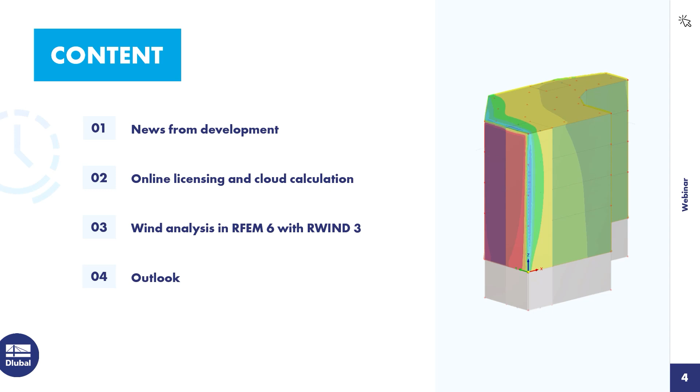The first feature that I want to show you is the consideration of initial states. So Rwind 3 now considers automatically initial states if they are present in RFEM 6. So whenever you are calculating a load case or a load combination that has an assigned initial state, then the initial state will be calculated first, and then this geometry is taken over to Rwind 3, and then the wind analysis is performed with this initial state geometry. This is especially important and necessary for membrane structures. So this is now possible.

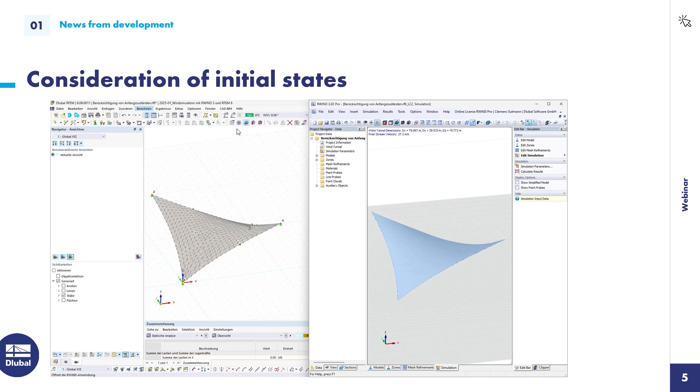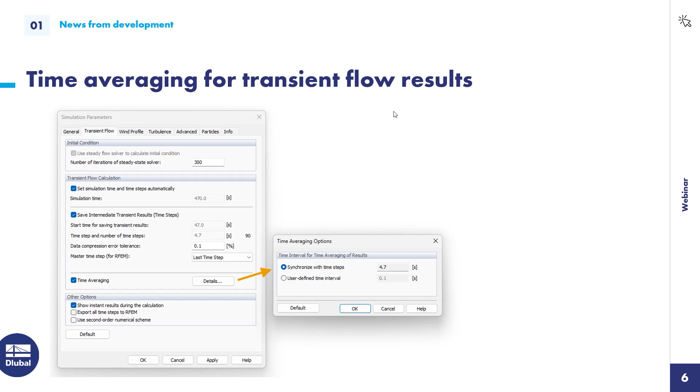Then you have now the possibility to average results over time when doing a transient flow analysis. This is a feature that is currently only available in Rwind 3, but not in RFEM 6. So whenever you need that, you have to go into Rwind 3 and change or select that option there.

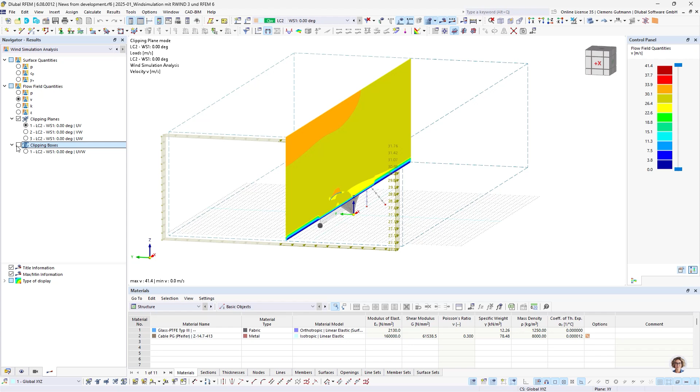The third new feature is the clipping box for flow field results. So I want to show you this directly in RFEM. Up until now, it was possible to display the flow field results in a clipping plane, and the clipping plane automatically had the size of the wind tunnel. And now we implemented a clipping box into RFEM 6. So you can reduce the size of that clipping plane to what's actually mostly needed. So usually you want to know the quantities around the structure and not for the whole wind tunnel that is only needed for the calculation.

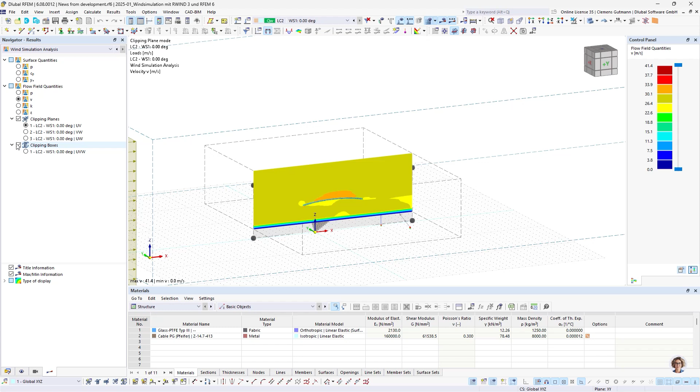And this is now possible if you activate that checkbox over here. And if you click the radio button, then you can drag the clipping box to the size that you want, and then switch back to the clipping plane, so you can manipulate the clipping plane as you need it.

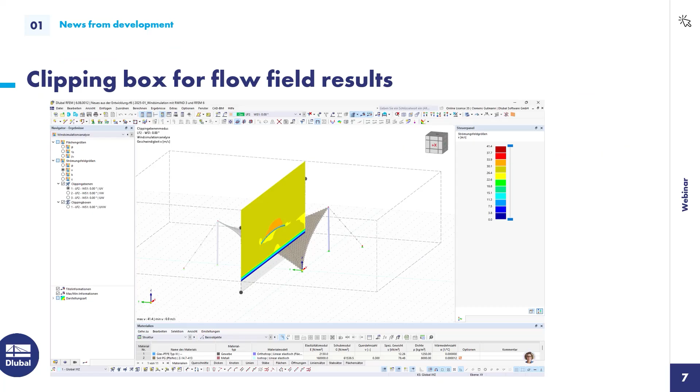We then implemented the possibility to display the pressure and pressure coefficients on the original model. So up until now, it was only possible to display the results on the computational model that came from Rwind. But now you can also inspect the results projected on the original model. I also want to show you how that looks in RFEM 6 itself.

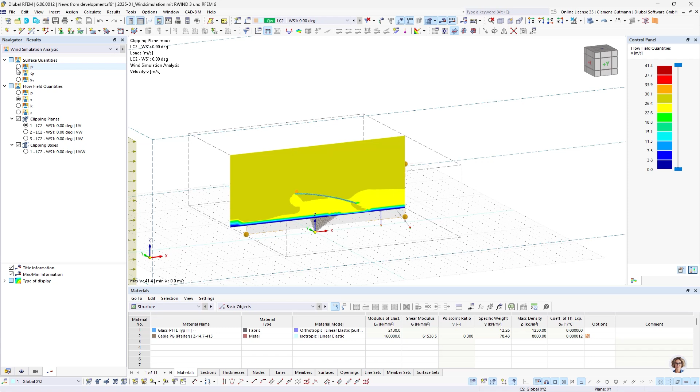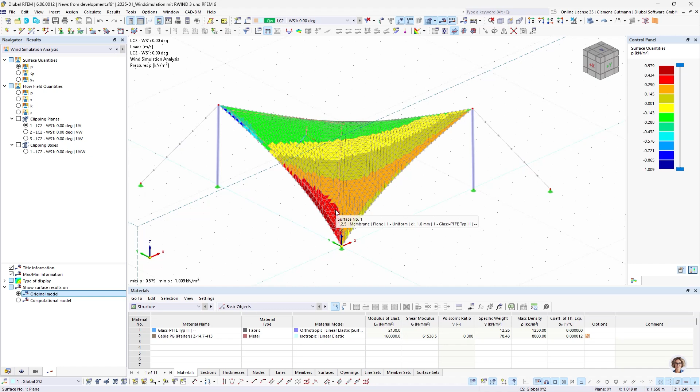So if you have the pressure or the pressure coefficients selected here in the result navigator, then you have a new possibility for the display down here. So this was possible before. You have the computational model from Rwind and the results displayed on it, but now you can switch to the original model and you see the mesh and structure of the original RFEM 6 model and inspect the results on the original model too.

And the last new feature is the possibility to close hollow sections. This is a new default setting that can be changed in the mesh settings in RFEM 6. I'm going to show you this in a second.

So usually, like with this membrane structure, you don't want the wind to go into the hollow section, because usually you have a detail there that connects all the elements together. But of course, it's also possible, if you have bigger hollow sections, to open them up. But usually it's not wanted. And there's this setting I'm going to show you.

You go on the mesh settings, wind simulation, and now you have here a check that says that only the external surfaces for hollow sections shall be used, and that also means that they are capped at the start and at the end.

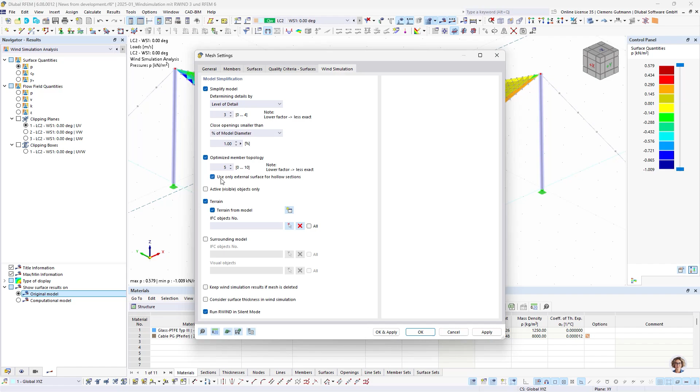Let's come to the biggest new feature from the last months. So as you know, we released RWIND last summer, and the most important new feature is the online licensing. The online licensing you already know from RFEM 6, RSTAB 9, and RSECTION 1, has all the advantages of coming with the online license, and these advantages we now brought to RWIND as well.

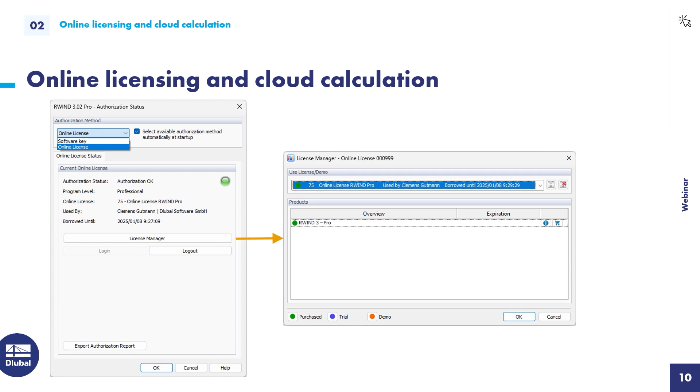So you can switch between the online license and the software key. So it is still possible to authorize the software with a software key, but the online license has a specific advantage to that, because it makes cloud calculation possible.

So cloud calculation, you already might know that we have this feature implemented into RFEM 6, where you can send your model to the cloud, have it calculated there, and then after the calculation has finished, you can download it from there and analyze the results and the model further. And up until now, it wasn't possible to analyze models that had wind simulation load cases active. And this is now possible if you switch to the online license.

And this leaves you with several advantages. So the first advantage is, if you do wind simulation, you know that it takes some time and also uses a lot of CPU, or all the CPU that is available, and therefore somewhat blocks your computer from doing other work. And by using the cloud calculation, you can avoid that, and the cloud does all the hard work, and you can keep on with your other tasks and continue your work with a model once it has finished calculating.

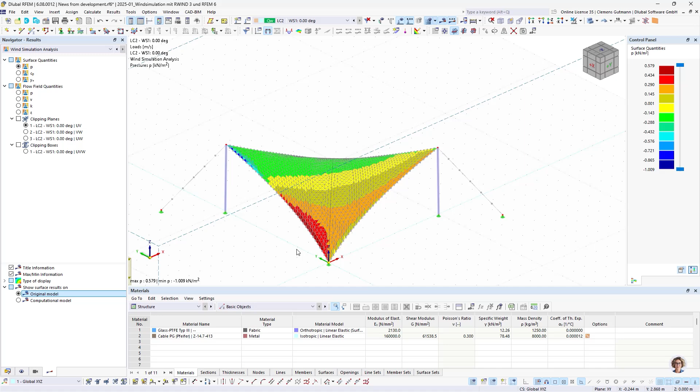And to show you how simple that works, I am going to delete all the results and send this small model to the cloud. So I go here where you usually click Calculate All. I select Cloud, Calculate in Cloud. And now a new dialog opens up where I can select the different servers that are available, and then I can check whether I want a notification once the calculation started and/or it has completed. And then I click Calculate in Cloud.

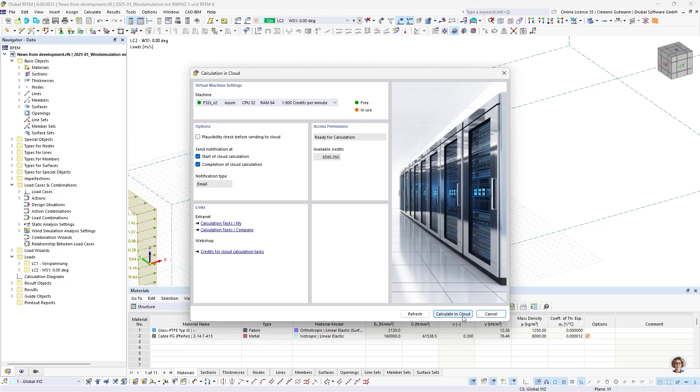The model is transferred to a server, and then I can track the calculations here in my extranet, which is also available in the Dlubal Center. I go to API and Cloud, and then I can see the task that I just sent. I have some recent cloud calculations, and I can inspect some details, and also have a download link. I'm going to show you later on, once the calculation is finished, how to proceed then.

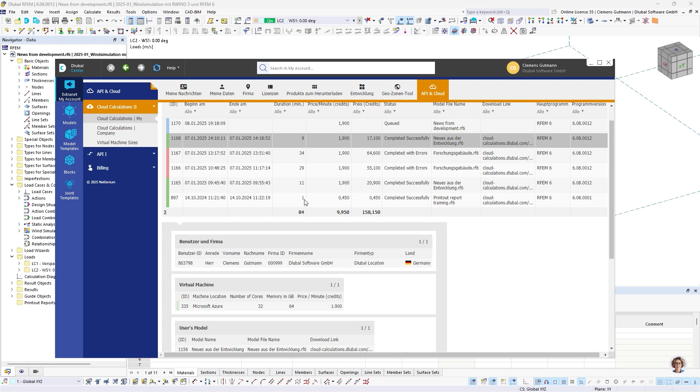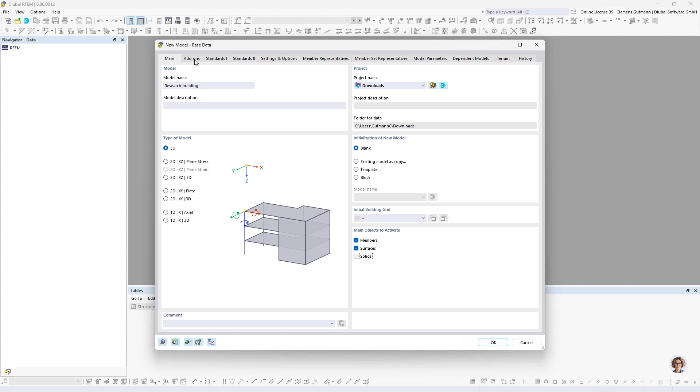Okay, I will now proceed to chapter number 3, where I want to perform a wind analysis together with you. And for that, I'm going to create a new model. I have a research building, and I don't need any solids today. I want to use the building model add-on as well as the wind simulation add-on. I leave the standards as they are, and I want to show that the Z axis shows upwards.

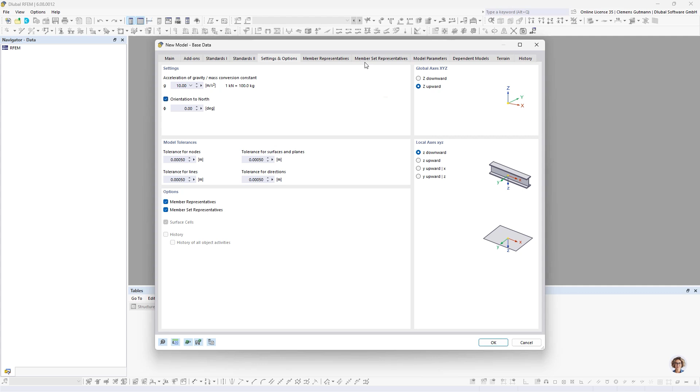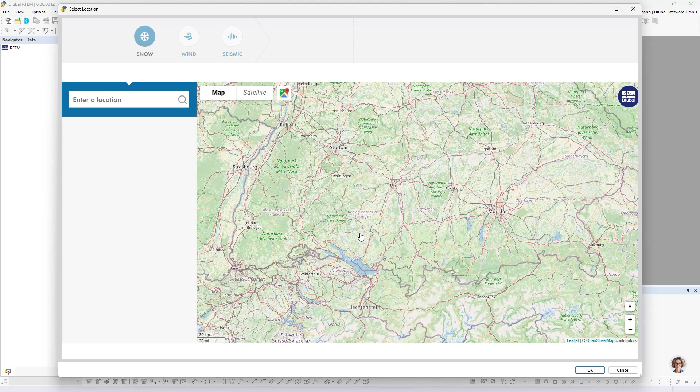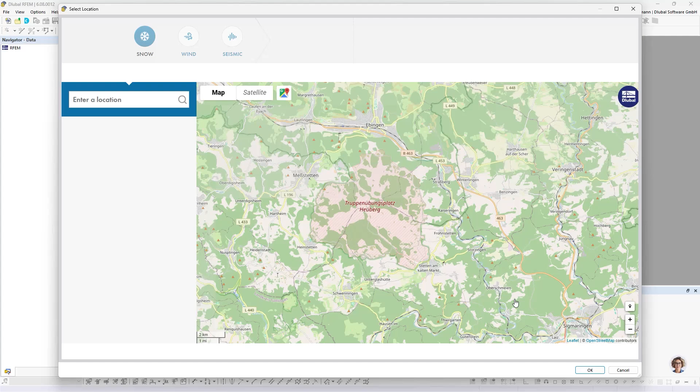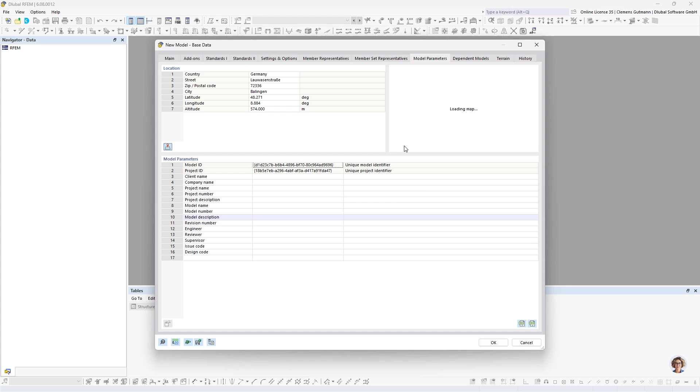Then there's a small new feature that I will show you as well, which is a north arrow that comes quite in handy for the documentation. I then want to pick a location, which is especially handy for the wind simulation, because automatically you get the right coefficients and parameters from the code. Okay, today I am here in Baden-Württemberg. My building is going to be constructed here, and now you can see the location automatically gets transferred, and also the load zone data is downloaded and will be available in the load wizards later on.

The last thing I want to change here is the terrain. Since we have a subterranean level, this terrain will be transferred as the base plane for the wind simulation, so that the subterranean level is not considered for the wind simulation. That's why I check this here. I click OK.

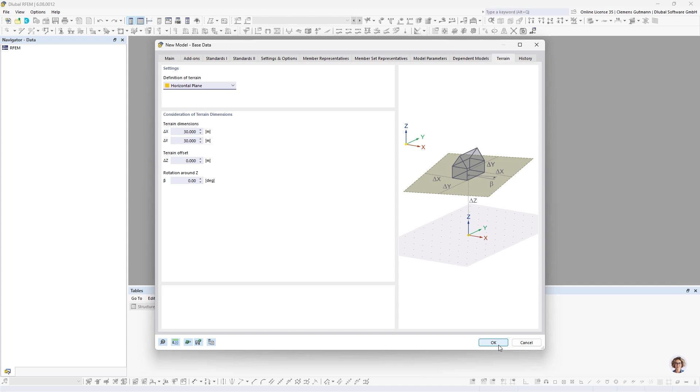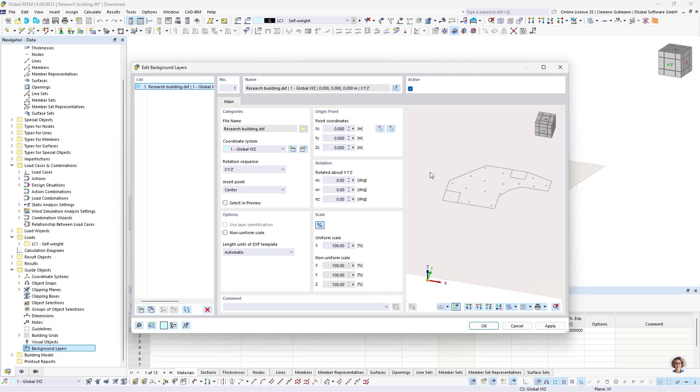Good. I then want to model by using a background layer. It's going to be a DXF file. Okay, and I want to place that DXF file in the bottom left corner, and I can do that by using that button, the right button here. All right.

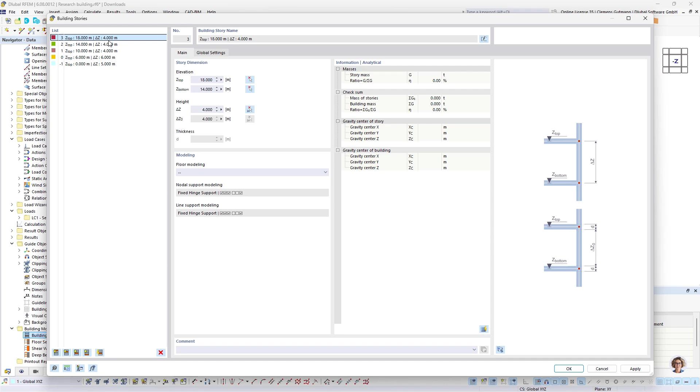The next thing I'm going to do, I'm going to set up my building model, and I'm going to create new building stories for that. So I have my subterranean level that is below 0 and has a height of 5 meters. The next will be the ground floor with 6 meters. And then I have 3 more stories with 4 meters. Yeah, that's everything for this.

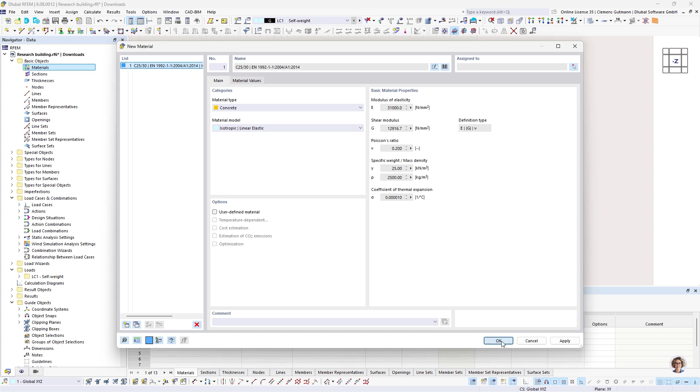I then create my first material. That is going to be a C25/30. Okay. And the columns in my building have a circular cross-section with 300 millimeters. The thicknesses for the walls and slabs are 24 centimeters, and for the base we have 35 centimeters.

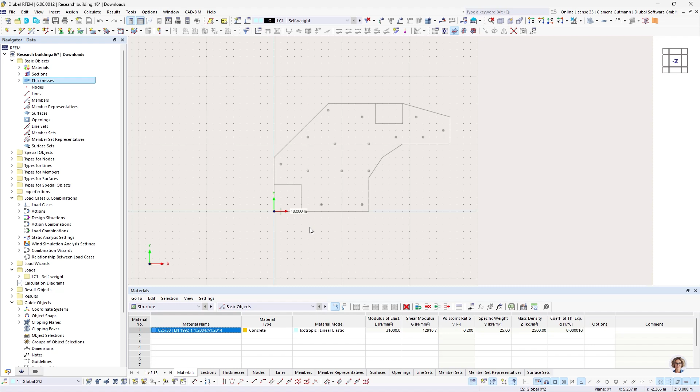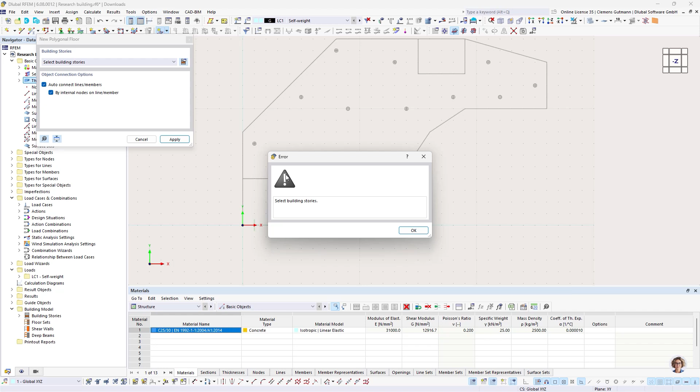Okay, if you are using the building model, you have some great modeling capabilities that can be found here. And here you can model columns, walls, floors, and openings, and not only one, but for every story individually or all together, what you select. So let's start with the floors. So I have a polygonal floor with these settings. They are fine. And then I'm going to just pick, sorry, I forgot. Here in this drop-down menu, you can choose which building stories are considered by this modeling. Every story has a floor.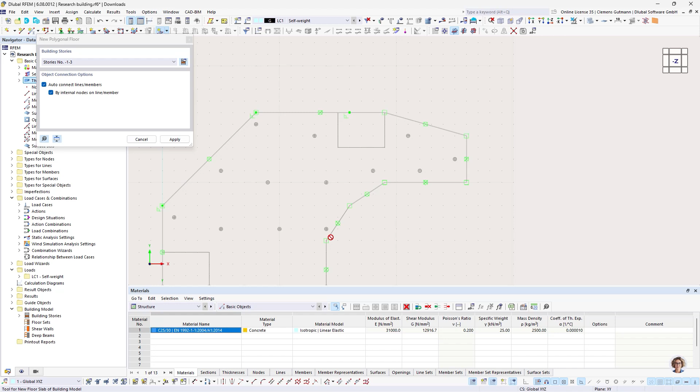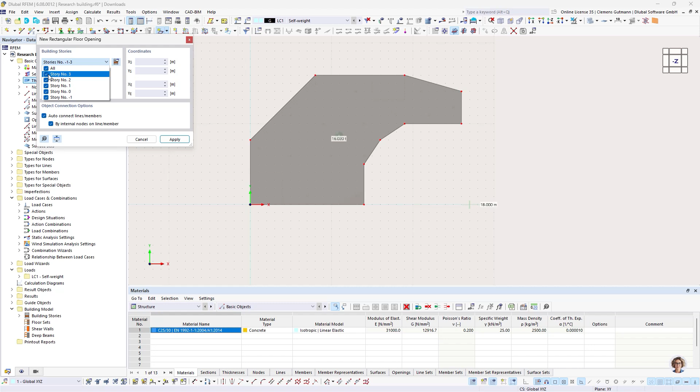And if I now pick all the corners and tilt the view a little bit, you can see that this floor has been created in every story. All right. The next thing I want to do is to create a rectangular floor opening, but not in the top floor. And that one is going to be here, and there. Double check. Looks good.

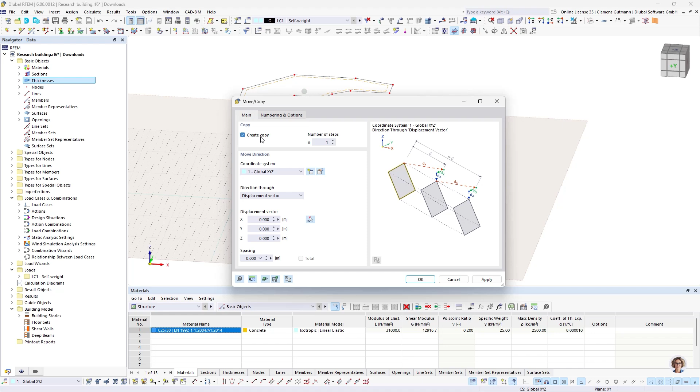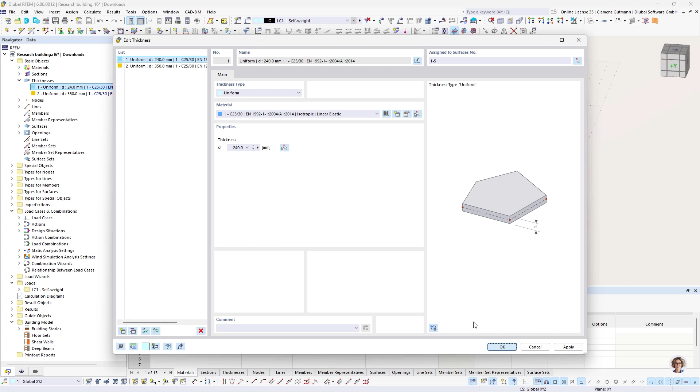I then want to create my basement. Therefore, I take the top floor, create a copy, and I have to add 5 more meters. Okay. And then switch the thickness to 350 millimeters. And I think I made a mistake here. Forgot 1 digit. All right. Good. So, by the way, this brownish thing is the terrain that we checked in the base data.

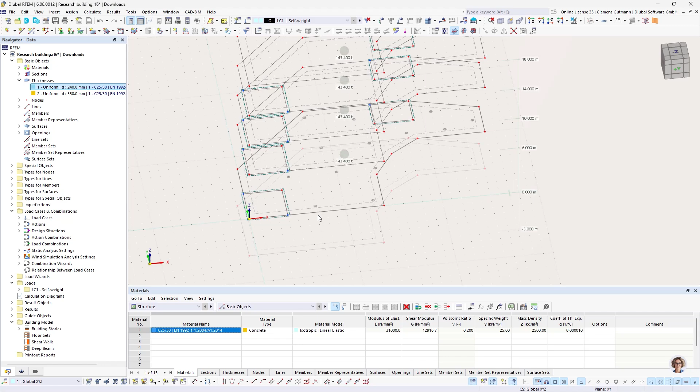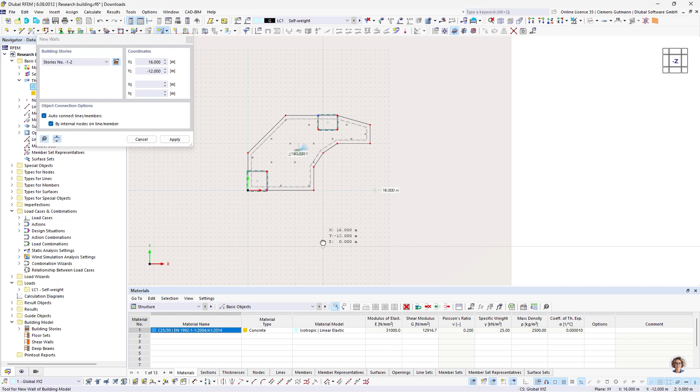Then we have our walls. And the walls I'm going to create the same way. So I'm selecting wall. Settings are fine. And then create the walls. Oh, forgot the top floor. Can just copy that by 4 meters. And everything is okay. Good. Then we have the concrete floors and concrete walls done.

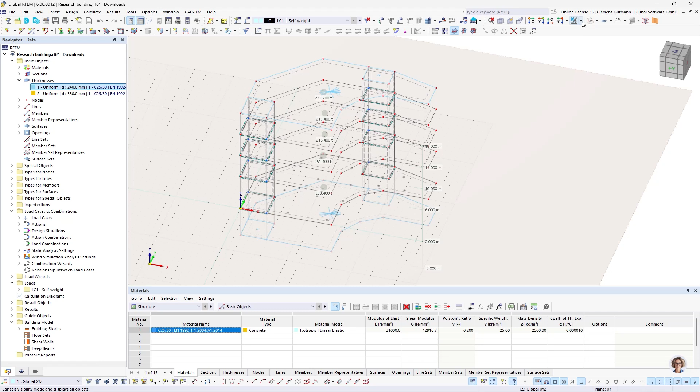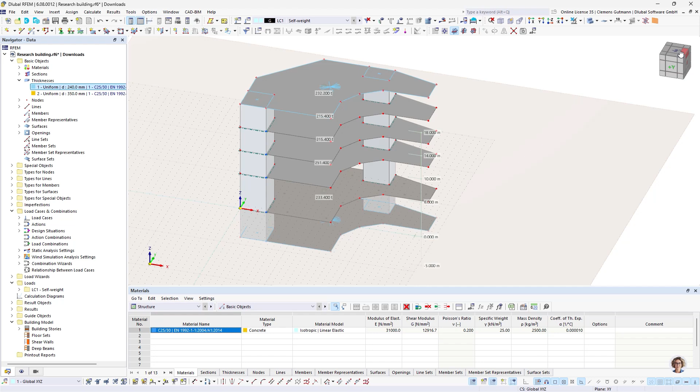And the rest of the building has a glass facade that I want to, of course, consider for the wind simulation, but I don't want to include it in the static analysis. This will be done later on, and that's why I'm going to use a special surface stiffness type, and that is going to be the load transfer surface. So the load transfer surface is a stiffless surface that only transfers the load to adjacent real objects, so the walls and slabs, for example, or other objects. And I'm selecting the Y stripes here. So only in the Y direction of that surface is the load being transferred, in one direction only.

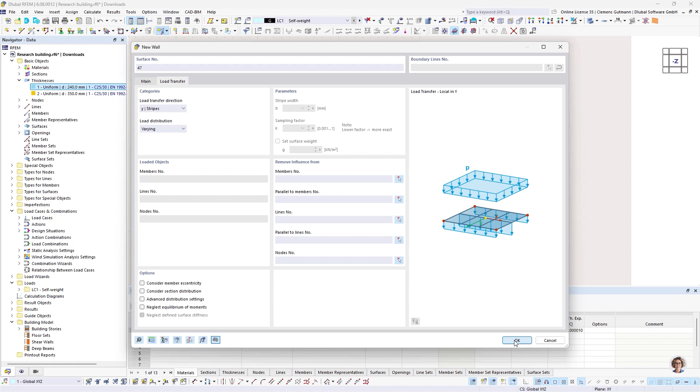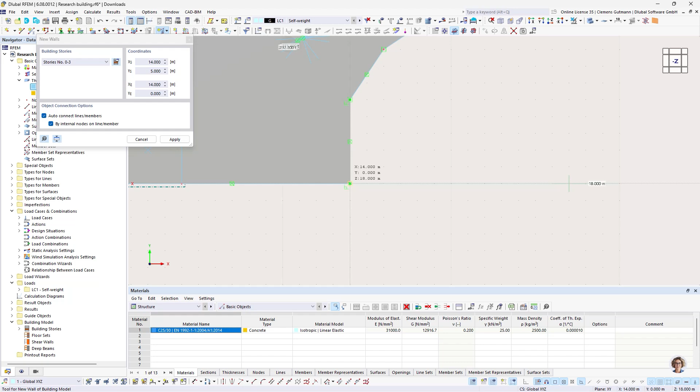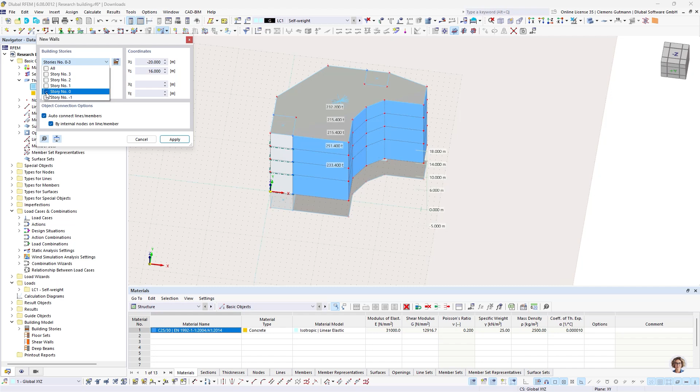Okay. And now I want to select all stories but the sublevel one. And then I can, again, model this very quickly. All right, that looks good. And now for the last one, I cancel that to change the parameters. And then one last time.

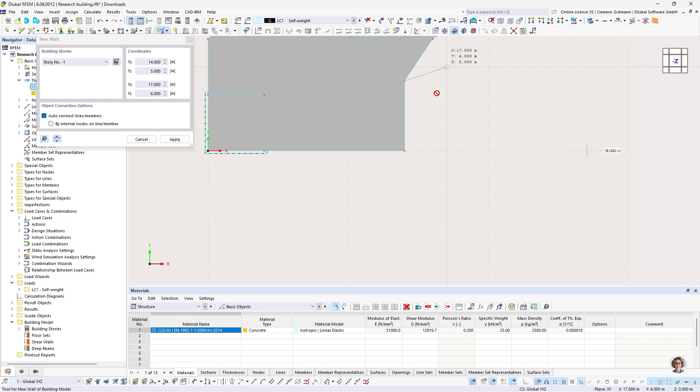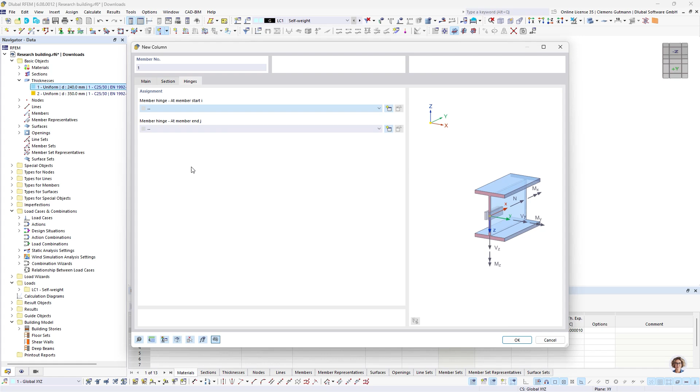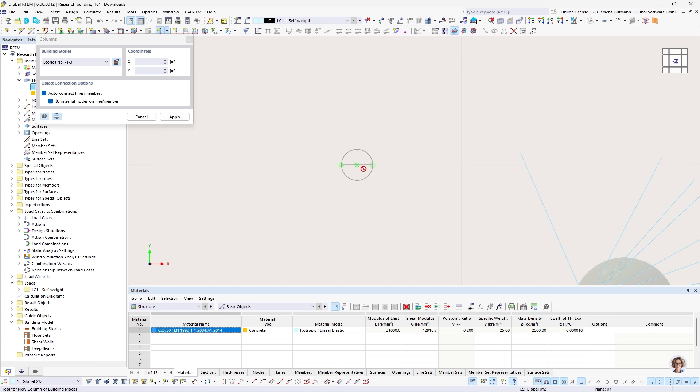All right. And the last thing that we need are the columns. For them, I will use a beam with member hinges at the end and at the start. Okay. All stories. And then just place them. And we are done.

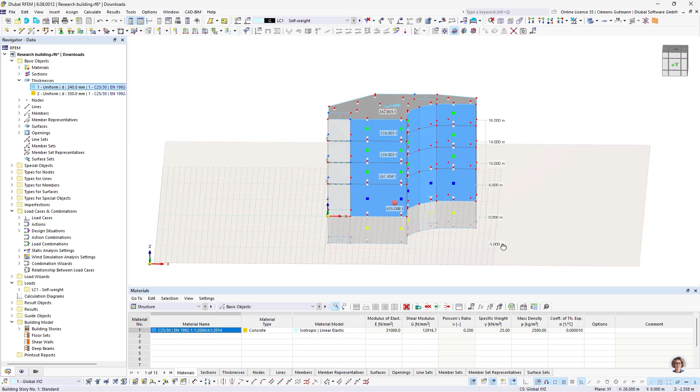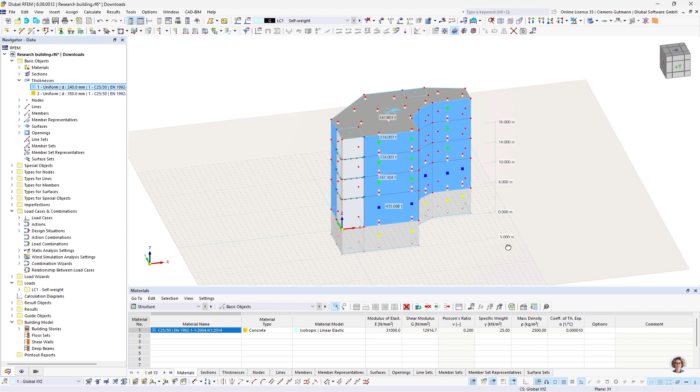So yeah, you can see how quickly it goes, how to model such a building. Of course, it's quite regular over the stories, but even if you have different stories, like different layouts, you can pick the stories that are similar and then model quickly the objects in the different stories, and the program automatically takes care of the correct height of the walls and dimension of the floors and so on.

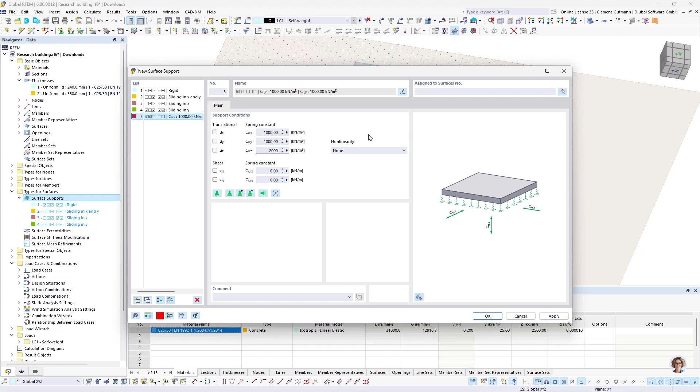We then need a support of the base, new surface support, and for that I'm going to use these values. They are just made up. I want to assign this to the base. Okay.

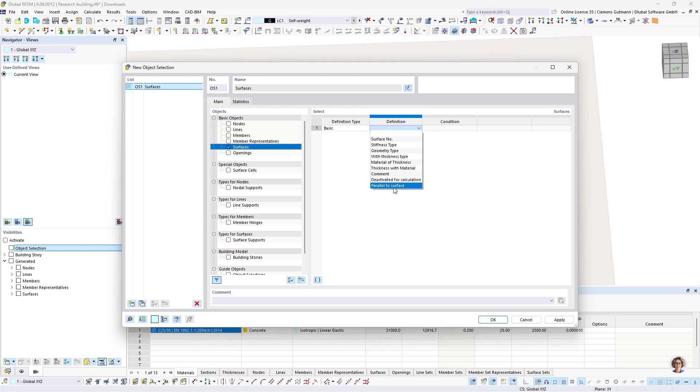Then we can proceed to the loading, and to facilitate that process, I'm going to create some object selections. So I want an object selection for all my surfaces that are parallel to any floor, so that are horizontal. And I can do that by picking this option, parallel to surface, and pick an example surface, and that is going to be the top floor. And now all surfaces that are parallel to that one are selected.

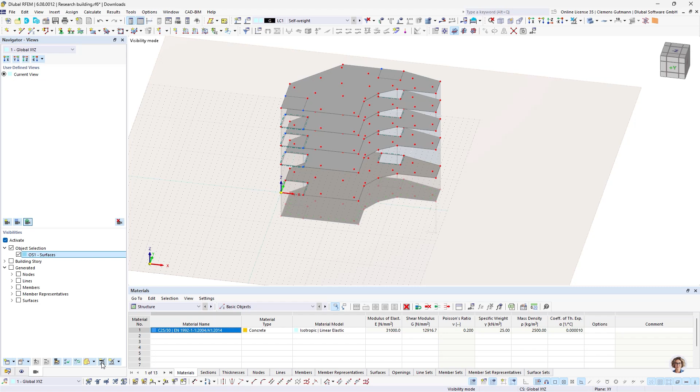And the second will be, no, we don't need any second. We can just flip that around by using this. And now we have all the columns and all the walls. Good.

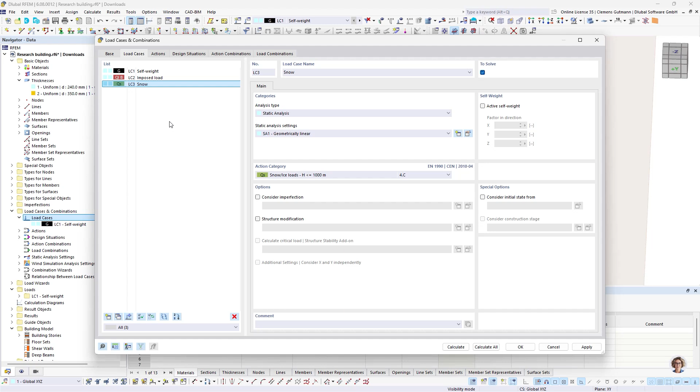All right. Then to the load cases. I want to create a new load case for the imposed load. Another one for the snow load. And the wind loads are then generated automatically later on when we use the load wizard for the wind simulation. All right.

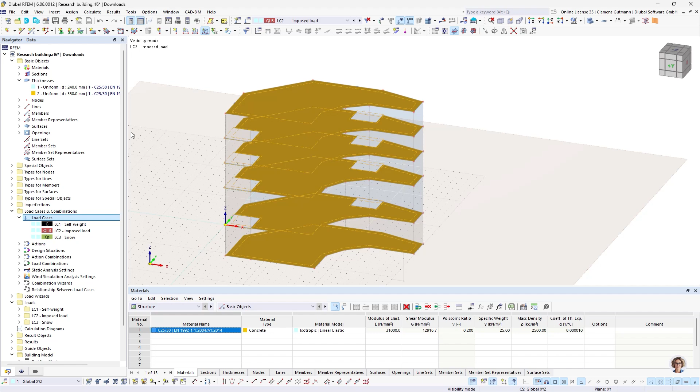Then we have some additional self-weight on our floors of 1 kilonewton per square meter. And an imposed load of 2 kilonewtons per square meter. And then finally a snow load in the area where the building is constructed. It is almost 2 kilonewtons per square meter that you can retrieve from the GeoZone tool on our website. And this is only assigned to the top floor and of course to the right load case.

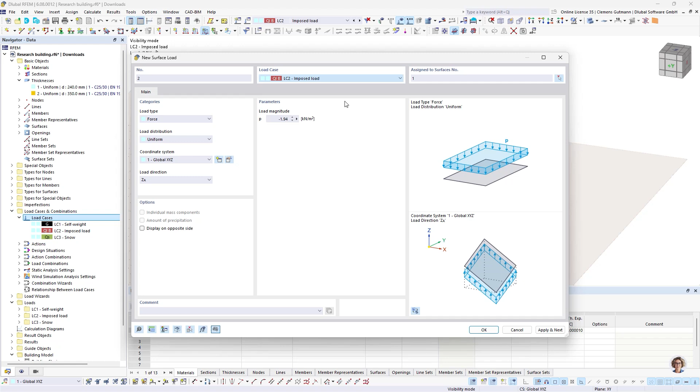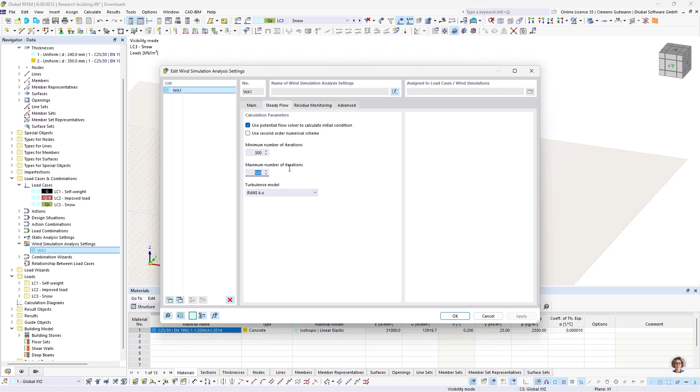Okay. Then I quickly want to change those settings. For now, they are fine. Almost, sorry. Okay. And then we can proceed to create the wind profile and then the wind simulation.

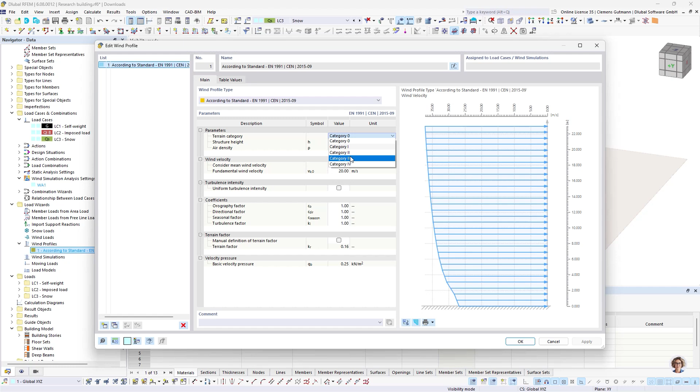So by default, the wind profile is generated by using the according standard. In our case, it's the Eurocode 1. And by default, the structure height and all the other settings are taken over for creating this wind profile. The only thing that we have to still choose is the category, and since this is at the edge of a town, it is going to be category 3. And this is everything that you have to do here.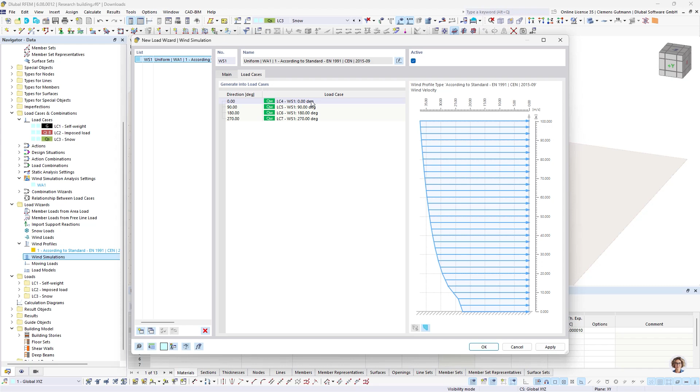And then we can create a new wind simulation with those settings that we just made. And I want a uniform wind direction, but with a larger step angle of 90 degrees. And the program automatically then generates those according load cases. We hit OK. Looks good. Then let's check one last time the combinatorics. That's also looking very good. And now we can calculate this model.

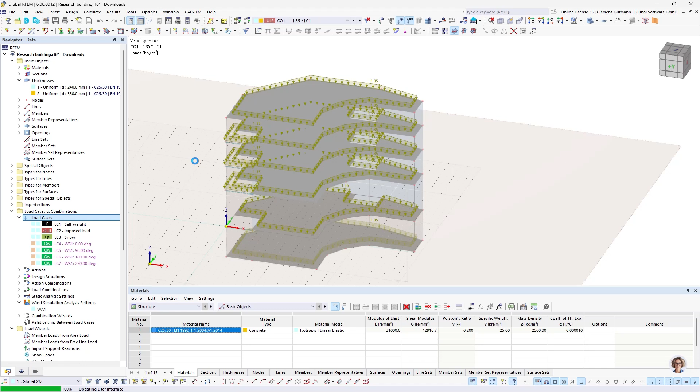Since we have several wind load cases, it would take too long for this webinar, but I could send it to the cloud now and calculate it in the cloud and then proceed further. I have done that earlier today, and I want to open the model with the results and then share them, analyze them further. All right. So now we can take a look at the results of our wind simulation.

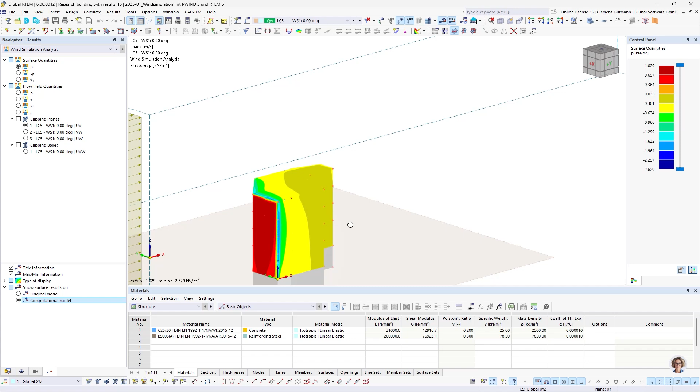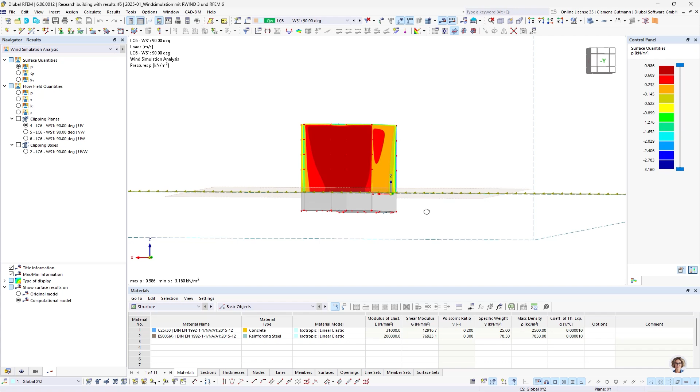And we can here now inspect the pressure, the wind pressures, and also the pressure coefficients, as well as the flow field quantities, whatever we want to know in the different directions that we analyzed, and now can get a better idea of how the building reacts to wind exposure. And as you can see, the terrain that we set in the beginning is now displayed, but the walls beneath the terrain are not affected by the wind.

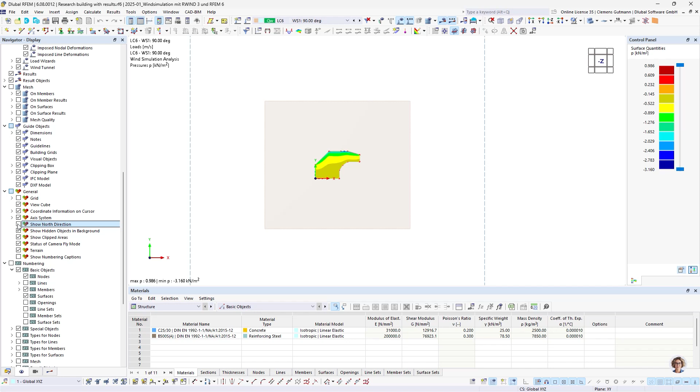And now I can show you one last thing. You can see the north arrow. By default, it's deactivated, but you can activate it here in the display navigator. I think this is a quite handy feature if you want to document the orientation of your building, and you can of course print that to the printout report.

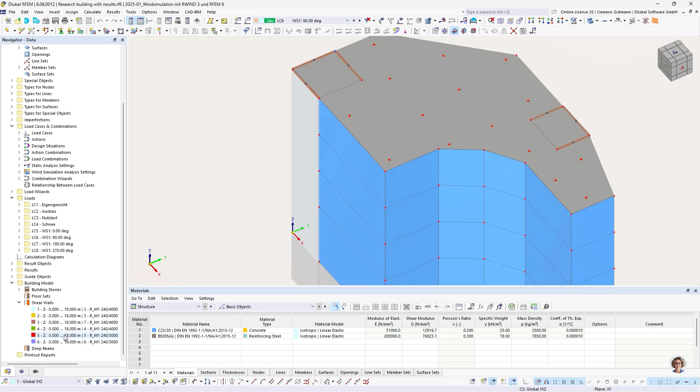One other thing that I want to show you is something that I forgot to model earlier on, but I did with this model. So with the building model, you can create shear walls that are usual for the bracing of a building, and those shear walls also have results. So you can now see, when using these vertical result lines, this is for the whole building. It hasn't something to do with the shear walls. So you have deformations and also generally the forces that the wind creates.

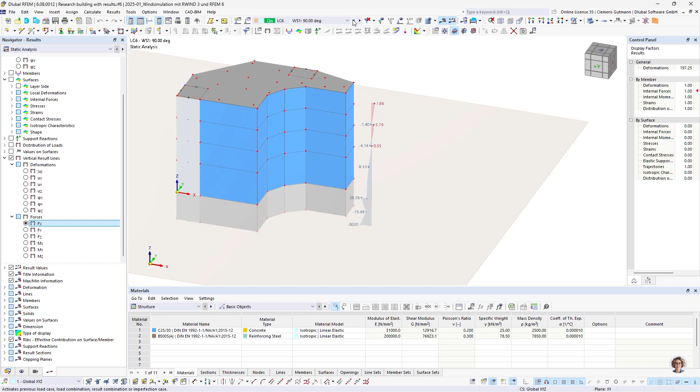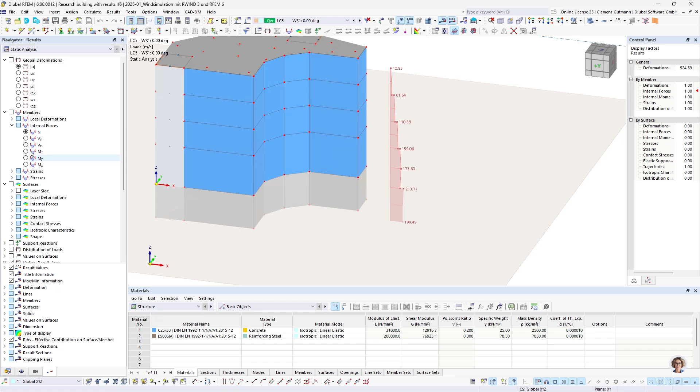So for example, if we display the wind tunnel, so the wind comes from the left, you can now see how big the impact of the wind is on the general building. But if you select, for example, the members, these shear walls are result members actually. And for example, here the Vy value, and make the building transparent. Then you can see for every shear wall how the forces distribute over the several shear walls in the several directions, and then design those shear walls accordingly.

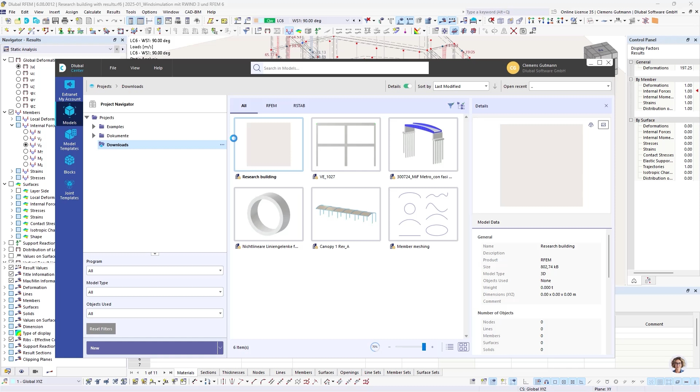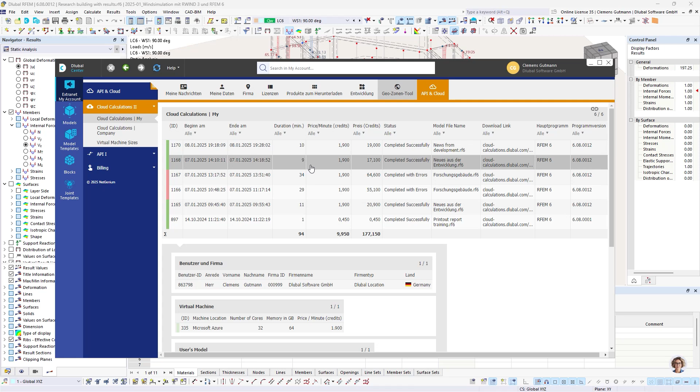Then let's go back to the first model that I've shown you, and I have received a notification that the calculation has been completed, and there's an email that looks roundabout like this. You can see how long it took, how many credits it cost, and you get a download link that is also, of course, available in the Dlubal Center. If you go to API and Cloud, I can now download this calculation to my PC. Okay.

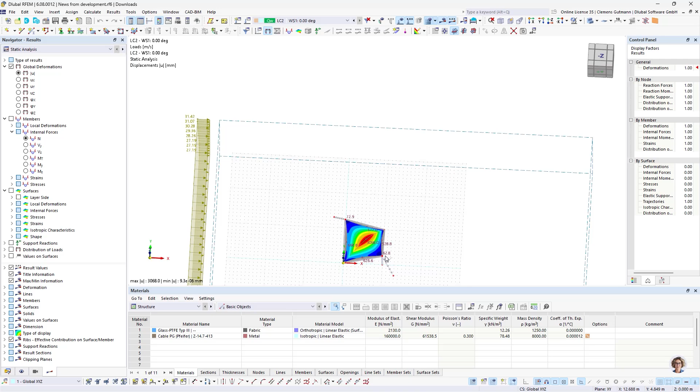And then open this one again. And we can see that all the results are there, and we can now proceed with our analysis and the design tasks that we have to do. So it's that intuitive and simple to use. Okay.

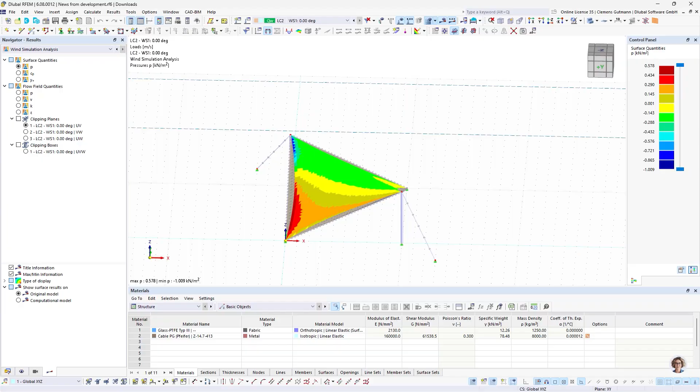Then to the last part of today's webinar, the outlook on the upcoming features. So we are currently working on program enhancements to meet the requirements of the WTG Code of Practice number M3. This is a German club that is dedicated to wind analysis and simulation. And this will include time-varying wind speeds. So up until now, you only can define one constant wind speed, but in the future, we will be able to vary these wind speeds over time.

The second thing we are working on is to bring more RWIND results directly into RFEM, so you don't have to leave for inspecting results to RWIND. So we want to bring every result that is available in RWIND also to RFEM 6. Then we are working on bringing the partial results from the transient flow calculation to RFEM 6, and that includes first the display and then also the usage of those single time steps in a static analysis later on, or dynamic analysis. This is quite a big thing, so it will take some time, but we are working on that.